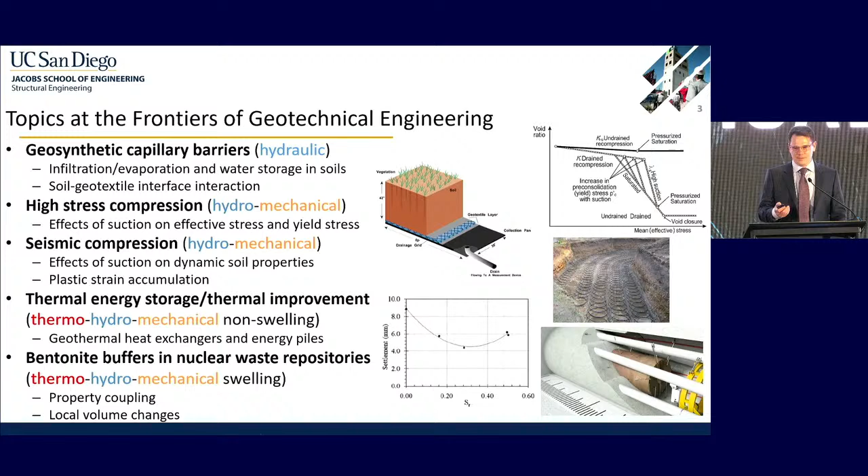There's a lot of challenges with unsaturated soils. I see it as a big opportunity. It's a lot of fun to study these problems.

The first are water flow problems. We'll talk about this with the capillary barriers. The soil and fluid properties change over orders of magnitude. We have different materials that are going to interact in different ways. And water can flow in different forms. It can flow as a liquid, but it could also flow as a vapor. And we need to then understand how water flow is going to be affecting the effective stress in the soil.

Similar to saturated soils, effective stress is an average term that we use to capture changes of mechanical behavior. But in addition to looking at the effective stress, the yield stress is critical in unsaturated soil mechanics. And the yield stress can change with temperature, with degree of saturation. And if you have wetting and drying, you could have even more complicated effects on top of that.

And then coupling is another very important issue because heat transfer processes, water flow processes, and mechanical processes are interconnected, both in terms of the governing equations as well as the properties that we use to quantify these responses.

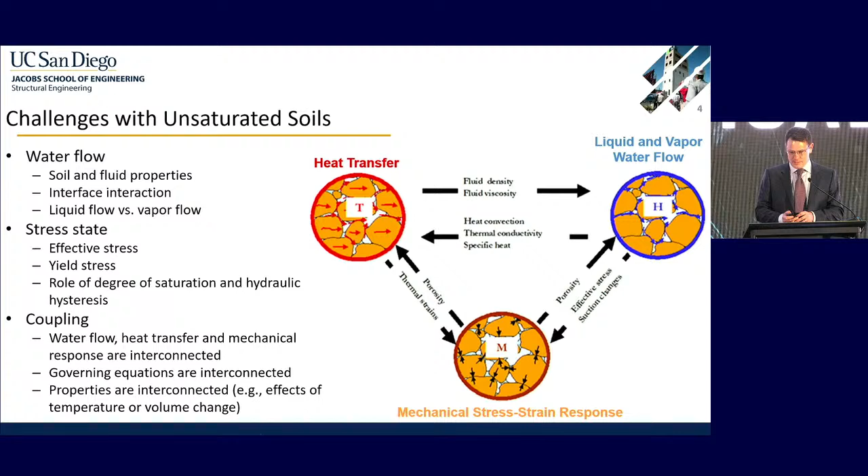So talking about geosynthetic capillary barriers, this was a topic I started working on during my PhD at University of Texas. These are used as alternative landfill cover systems. They're very interesting because they're trying to mimic the natural soil layer where water comes in via infiltration and it is removed later by plants.

One interesting thing that we're seeing in some early experiments is that if you have a geotextile separation layer at the bottom of the soil layer, water will not go into that until the soil above it becomes fully saturated. So we wanted to explain how that happened, and that got me involved with physical modeling, and I'll show some results of those, and started my interest in unsaturated soil mechanics.

One of the most important things with unsaturated soil mechanics is the definition of the soil water retention curve. There's many different techniques, and all of them have different features.

With unsaturated soils, water can flow either by liquid or vapor, and usually we're going to push or pull on either of those phases. So if you want to pull the water out of the soil, it needs to have a continuous liquid phase. So this axis translation technique and hanging column technique require those aspects. But we could also use a technique where we control the relative humidity of the water vapor in the soil, and that requires a continuous air phase. So they're kind of complementary to each other, but two different mechanisms.

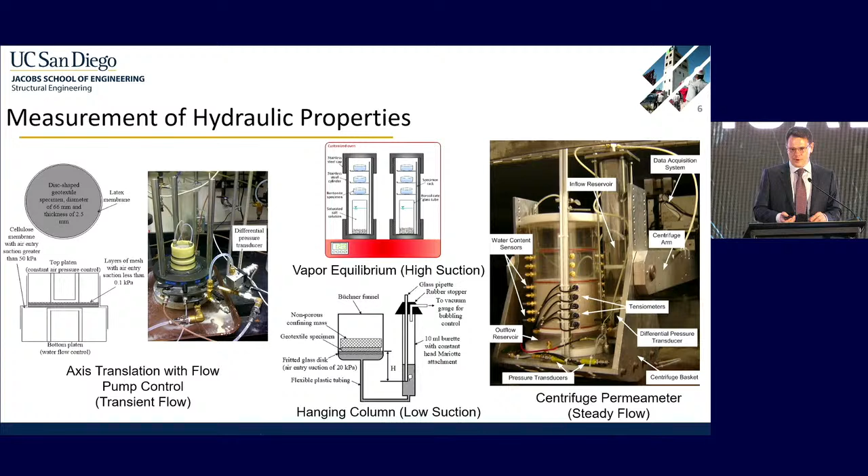Talking about how hydraulic capillary barriers work, usually you have a cover layer of soil on top of a coarse-grained material, which in this case is a geotextile. If your soil is compacted into place, it's usually going to be initially dry, and you can see the blue arrow tells you the initial suction in the soil. The soil water retention curve is shown on the left.

At that same suction value, if you look at the figure on the right, this is the hydraulic conductivity function. One other challenge in unsaturated soils is that parameters vary over large orders of magnitude. Hydraulic conductivity can vary over a large range, and suction, which is the energy state in the soil, can vary over a large range.

So if you're at the blue line there, maybe at 100 kPa, the soil, which we think of as a low permeability material, actually has a higher hydraulic conductivity than the nonwoven geotextile. The nonwoven geotextile is full of air, and that means it can't conduct water. So in order for the water to flow from the soil into the geotextile, that overlying layer of clay needs to become wet. You have to move up the soil water retention curve until you get to the green point where your hydraulic conductivity between the two materials is equivalent. We call that breakthrough, when water starts to flow from the soil into the geotextile.

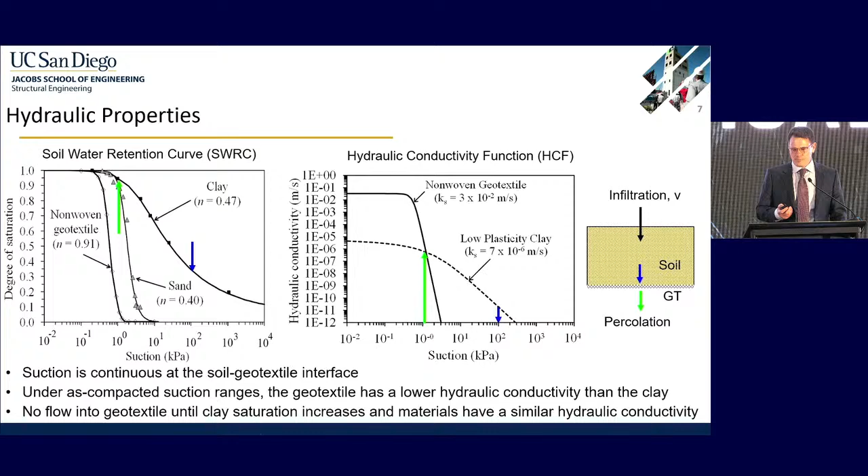This was a complicated problem, and I was a student, and I wanted to understand how it worked. This is back in the phase of my career where I painted everything burnt orange. This is from Texas - I think if you visit Professor Zornberg's lab, you can still see some of the burnt orange facilities. In this, we had a layer of soil on top of a geotextile layer.

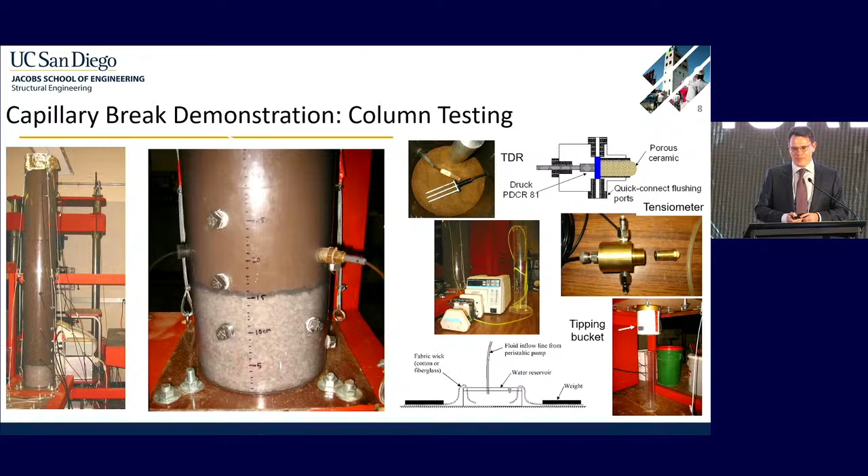We had instrumentation at different depths to measure water content and suction, and we rained water at a constant rate and collected the outflow from the bottom. So these are some typical results that you can see.

In this beginning stage where we have transient infiltration, the water is moving down through the soil, and suddenly it reaches the geotextile. You would normally think that it would just travel into the geotextile because the geotextile is a very permeable material - we use it as a filter, as a drain material. But because of this contrast in pore size, water starts to build up on top of that, and you can see it gets wetter right above the barrier layer, and you have an increase in water storage in that area.

So this is an example of using physical modeling to understand how the water process is flowing through the soil, and how we can understand the increase in water storage.

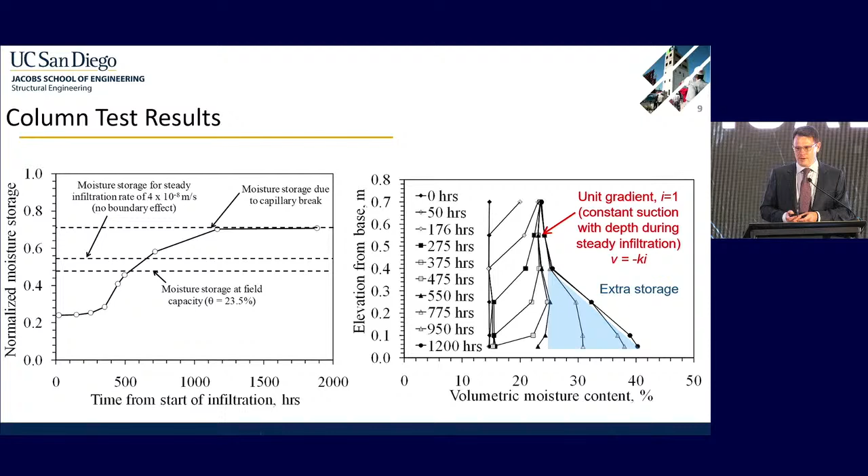I also had the privilege to work with Professor Zornberg on geosynthetic capillary barriers in the field. This is the Rocky Mountain Arsenal in Denver, Colorado. They wanted to build one of these evapotranspirative cover systems, and they wanted to test to see how it works first. So they put a geomembrane barrier at the bottom, and they wanted to collect all of the water that came down to the layer of this geomembrane. Then they put a geotextile on top of that to act as a drain. So even though they weren't hoping to create a geosynthetic capillary barrier, they created 4 of them instead.

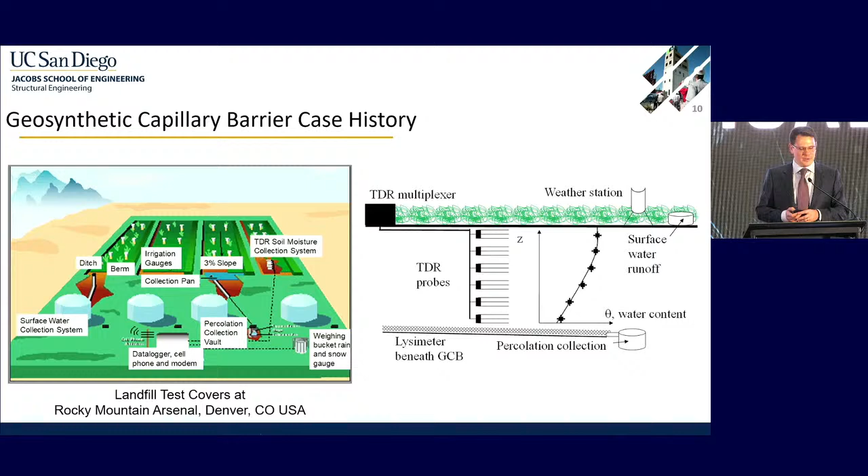There were some challenges with the data from this site because it got struck by lightning several times, if any of you have been to Colorado. My first paper that I wrote was correcting this water content data, and we saw some interesting results once we filtered that out. At the ground surface, it was getting wet and dry.

It's changing as the atmosphere is interacting with the soil. But then, as you go a little bit deeper, there's some moments in time where the soil starts to get wetter. And when you go deeper down in the soil, you see that it even gets wetter than that, almost fully saturated. So this is kind of mimicking what we saw in our column tests, where water starts to flow in, we have a unit gradient, and then it starts to build up at the base. Fortunately, because Colorado is a very arid place, evapotranspiration removed the water, so it was able to recover after that.

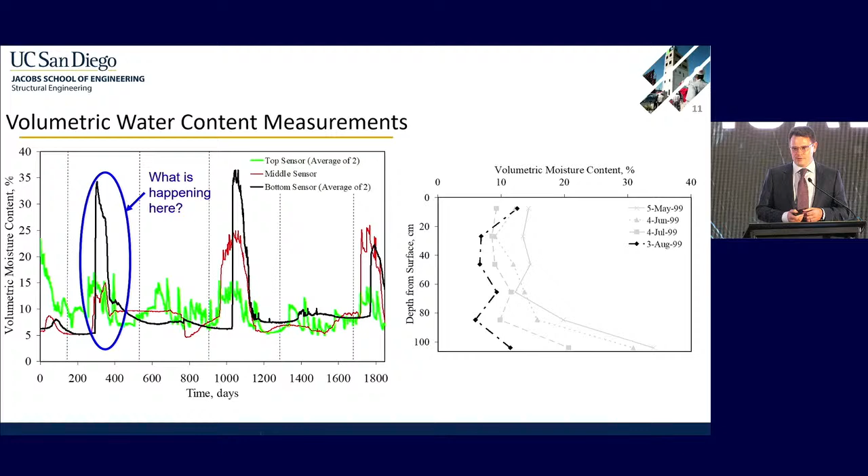So there's still problems to solve on this topic. This is just showing that over time, these covers are storing water during the rainy season and removing it during the dry season. Over time, they're behaving relatively well. If you look at the water balance from the moisture storage, you find very little percolation, so very little water went through the base of these cover systems. So it works pretty well.

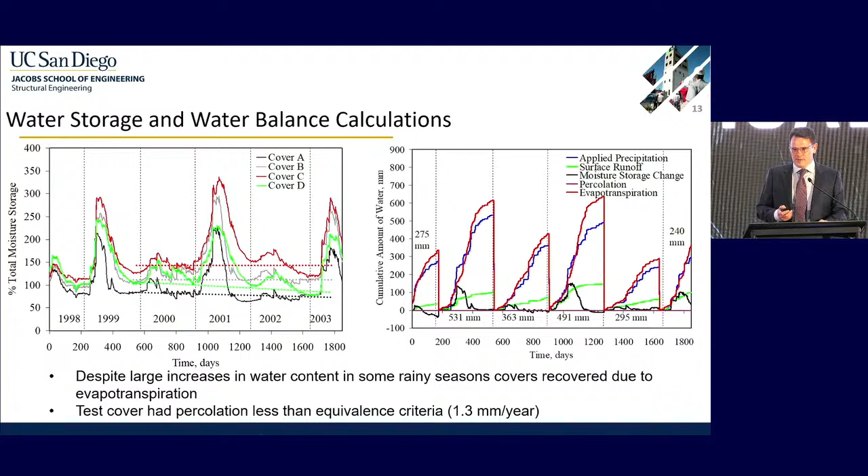We decided to keep doing some additional tests to see if these cover systems could recover. We did some mini column tests where we measured the periods of breakthrough, then dried the soil out and tried it again. It was very repeatable. So even if we do have breakthrough and water gets through the system, it's going to be able to recover over time.

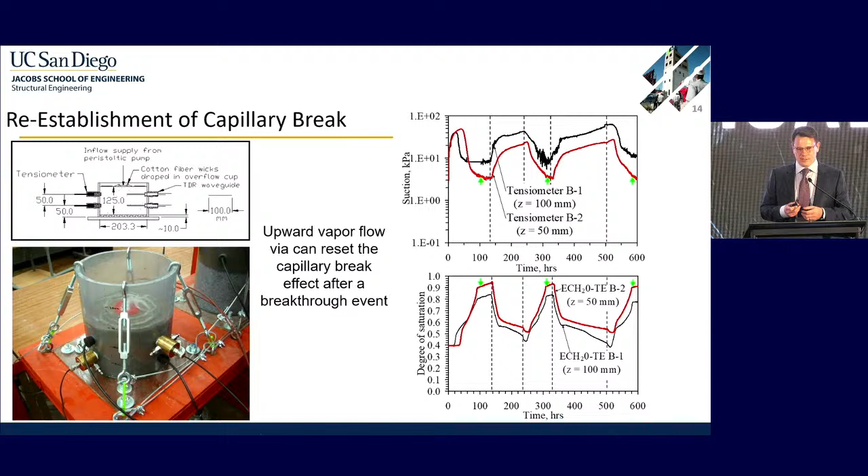So a few takeaways from this first topic. Laboratory and field scale testing are critical to interpret the behavior of near surface soil layers under atmospheric boundary conditions. We can use the different principles of unsaturated soil mechanics to make these covers work. But it's very important, if we want to improve our numerical simulations in the future, to measure hydraulic properties using the flow processes that are happening in the field. So if we're having infiltration and evaporation, you want to use tests that have those same pathways in order to match what's happening in the field.

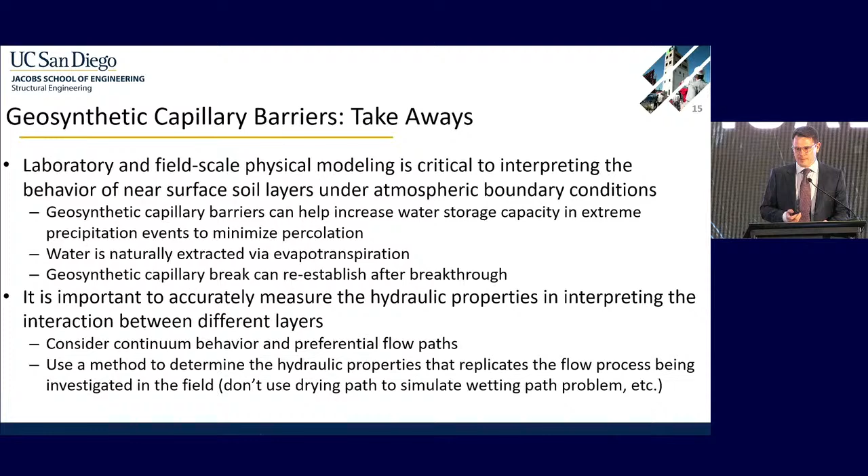So that was my first encounter with unsaturated soil mechanics. The second topic I started working on at University of Colorado, when I went back to start my career in academia, was the behavior of unsaturated soils under very high stresses. I wanted to take some of the things I learned from this first case history and put it together on this. We're looking at a project for ONR on buried explosions.

These processes can happen very fast, but fortunately, one of the key parts of the solutions to these problems is the backbone curve - just your quasi-static compression curve of the soil. Most geotechnical problems only go up to about 10 MPa. In this case, we were going out to about 70 MPa. So we're able to see how the soil behaves under these conditions, and unsaturated soils can have a very major effect on the behavior of the soil in these cases.

So the first thing we need to use is the effective stress. The nice thing about using effective stress in unsaturated soils is that you can integrate the soil water retention curve into the definition of the effective stress, and you could potentially use this to capture the changes of effective stress during wetting and drying. So that's the first component you need to look at mechanical processes.

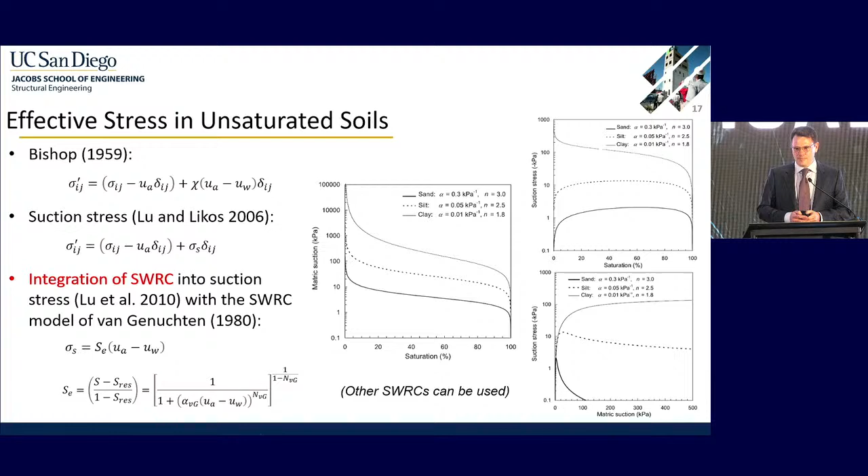We're using the soil water retention curve to model infiltration and evaporation, but now we're also using it to represent our stress state. It's very well established that the shear strength at failure shows an increase in the apparent cohesion of the soil as it dries out. If you interpret that shear strength versus the effective normal stress for different suctions, everything lines up onto a single line using effective stress.

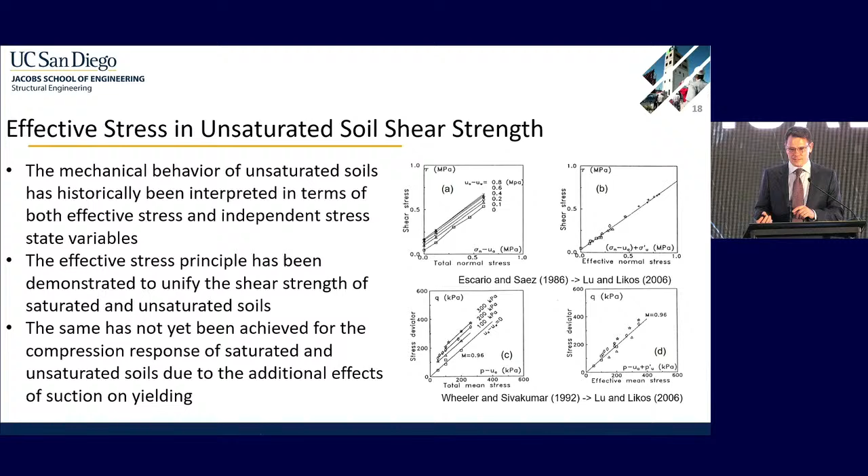So effective stress is used to capture changes of shear strength at failure, but people haven't had a lot of luck applying effective stress to compression problems. That's because suction also has an effect on the yield stress. Back in the 1960s, there was a big controversy about using effective stress to model the compression of unsaturated soils.

So until you start to accept that you need to use both the effective stress concept and the yield stress concept to capture unsaturated soil compression, you're not able to use unsaturated soil mechanics and effective stress to capture the compression response.

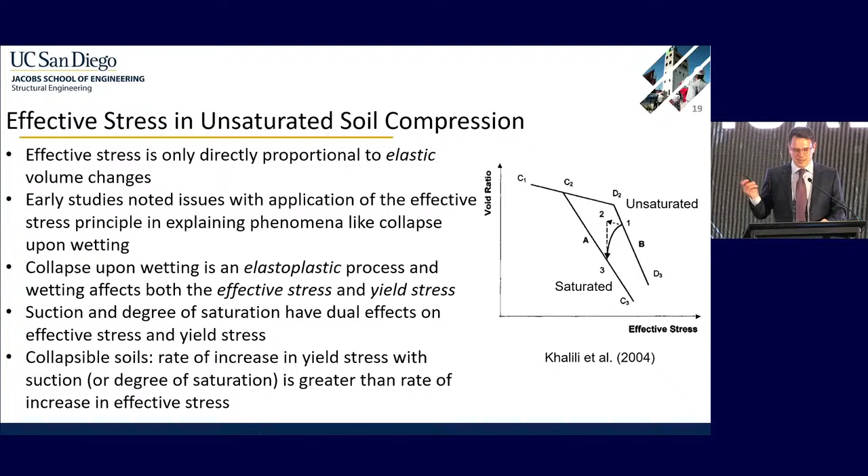So we started from that perspective, and we started to look at the behavior of soils when you load them to high stresses. First we would apply some initial suctions to the soil and then start to load it out. We do see this increase in yield stress as the soil gets drier.

One interesting thing we wanted to look at when we go to high stresses is that you can squeeze all of the pores and get rid of your air. This is the case of a drained compression where the air is allowed to escape. At some certain point, your compression curve needs to converge with the saturated soil. So we can call that pressurized saturation.

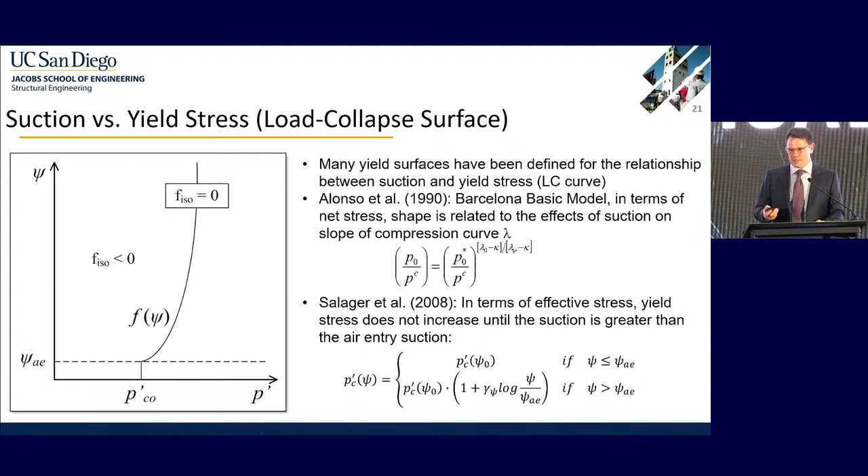And the slope of your compression curve for unsaturated soils should always be inclined back towards the saturated curve. This is the concept of the yield stress load collapse curve. As your suction increases on the y-axis, the yield stress increases and the soil gets harder and harder as you go out. There are different equations that have been used to capture this in terms of net stress or in terms of effective stress.

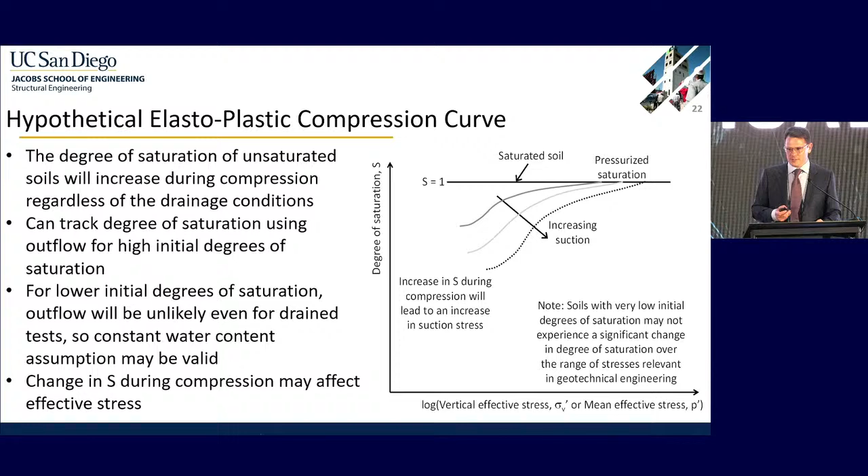This is just showing how the degree of saturation is going to be increasing. It's very tricky to track the degree of saturation in unsaturated soils, but if you don't measure this, it's not going to be very easy to apply the effective stress technique. So in these cases, you can see the soils are initially dry, and you compress them up to high stresses, and you reach this pressurized saturation state.

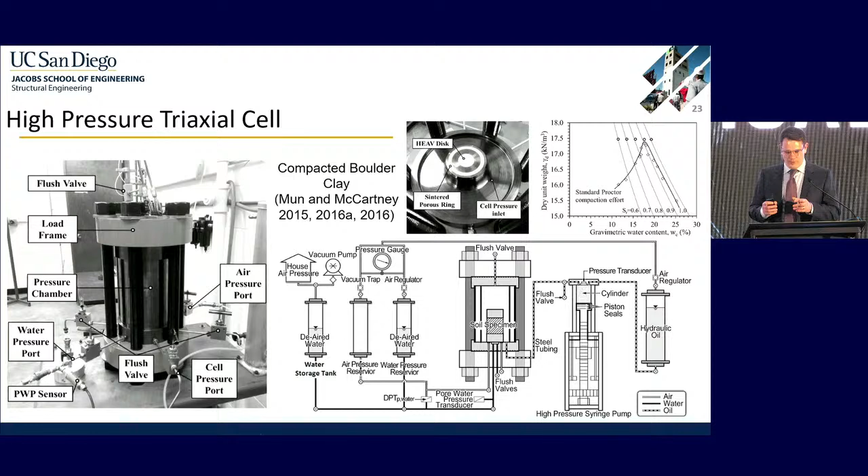When you go out to higher stresses than this, things get a little bit weird. The bi-log linear model that we usually use in geotechnical engineering is not going to work very well when you go to high stresses, because things get squished down.

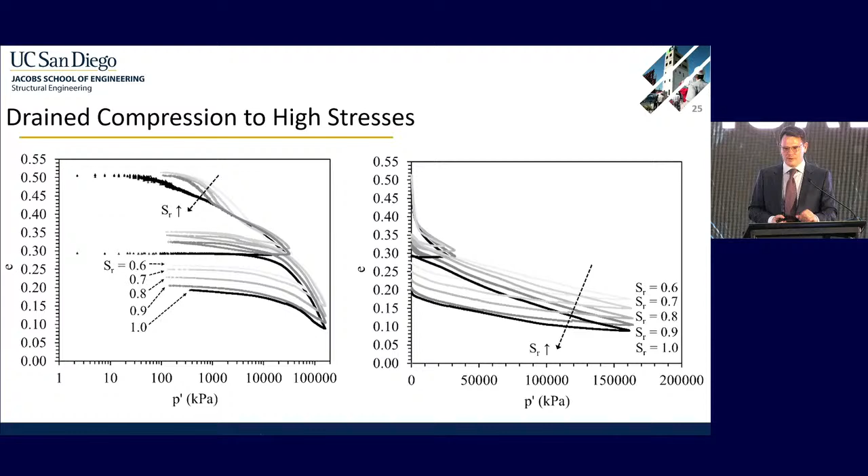These are drained compression tests where we keep the suction constant throughout the compression stage. We could also do undrained compression tests. This is probably more representative of what will be happening during a fast loading case.

In these cases, the water is not allowed to leave. You have air still in there. And when you pressurize this, the air can dissolve into the water. So this is another interesting part about unsaturated soils that makes things complicated. You can see that there's a steep decrease in the void ratio up to a certain point, and then it follows the compression index of water once you get to this high stress.

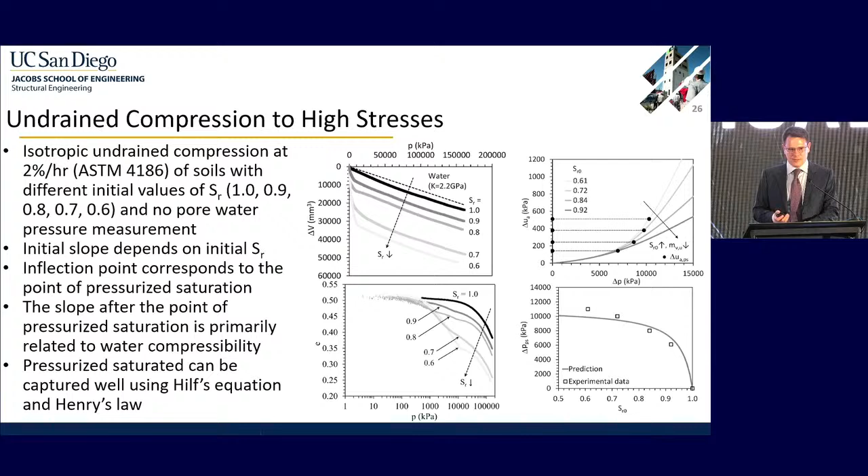So we're getting pressurized saturation without allowing the air to leave. We're dissolving the air into the water. And we can use some techniques like Hilf's equation combined with Henry's law to predict this pretty well.

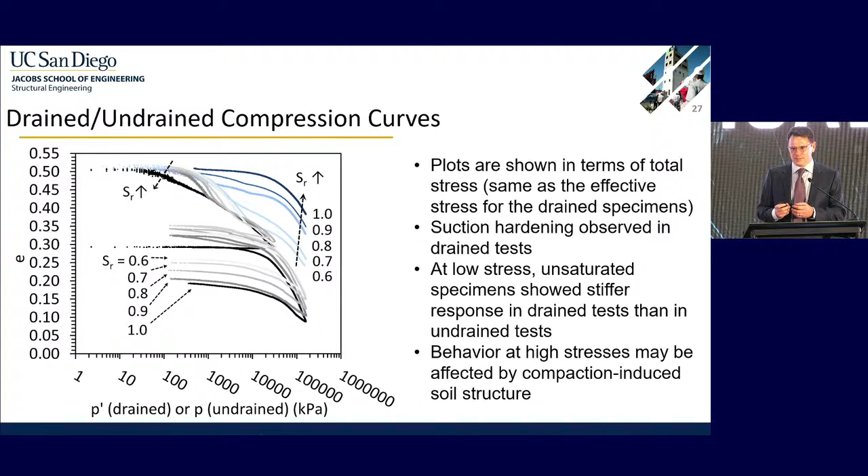But then putting the undrained and drained together, it's interesting to see that you have the saturated curves on either side. The saturated curve under undrained compression is basically compression of water. And then the saturated curve for drained conditions is the softest state. And if you have undrained conditions on a very dry soil, it's going to be very close to the compression of a drained soil.

We tried to put our results into the context of the literature. We went and reinterpreted some of the results from previous studies in terms of effective stress. And we found that the trends that we were expecting from our conceptual model held for most of the soils.

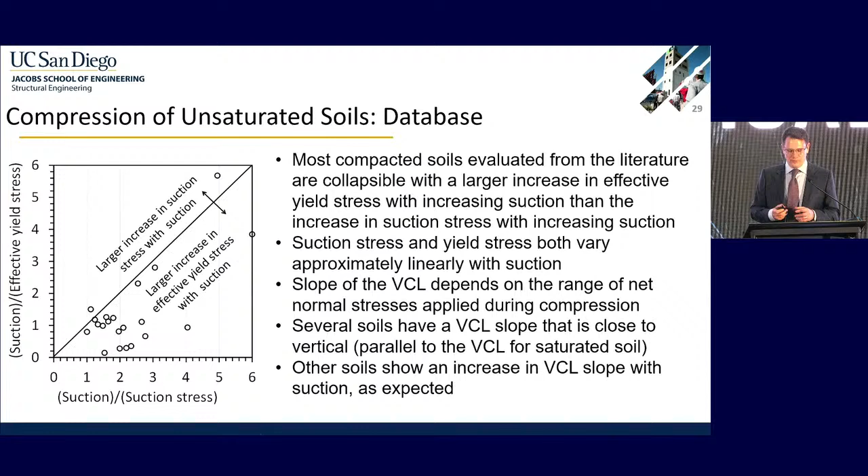Our suction stress at yield increased with suction. Our effective stress increased at a different rate. You can see that usually the yield stress is increasing at a faster rate than the suction stress. And the virgin compression curves were generally either vertical or inclined, going back towards the saturated curve. So most of the soils in the literature, we're going to call those collapsible, because they have a greater increase in the yield stress than the increase in suction stress.

One other tricky thing we've looked into, but I think is still a topic for future research, is the role of hydraulic hysteresis. The soil water retention curve is not unique—we have a drying path and a wetting path, and we want to integrate that curve into our effective stress equation, but we can have two paths for that. When you compress the soil, either under drained or undrained conditions, you could potentially start to change your soil water retention curve as well.

On the drained case, you can see that the soil water retention curve is shifting upwards as you compress the soil, so you need to take that into account when quantifying the effective stress. In undrained conditions, you're going to be following some sort of a scanning path.

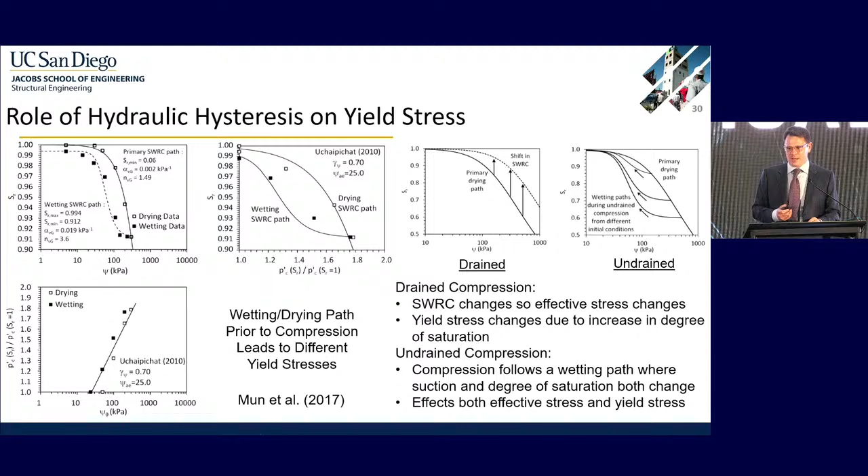So there's a lot of potential still on this topic to make further advances. We want to make sure we integrate our soil water retention curve into our stress state, and consider these independent effects of suction on the effective stress and the yield stress. All soils become saturated when you load them to very high stresses.

Okay, going on to the third problem. So now we had quasi-static loading. When you live in California, you have to work on earthquake-related problems, so I decided to get interested in the concept of seismic compression—the settlement of unsaturated soils during earthquake shaking due to void collapse.

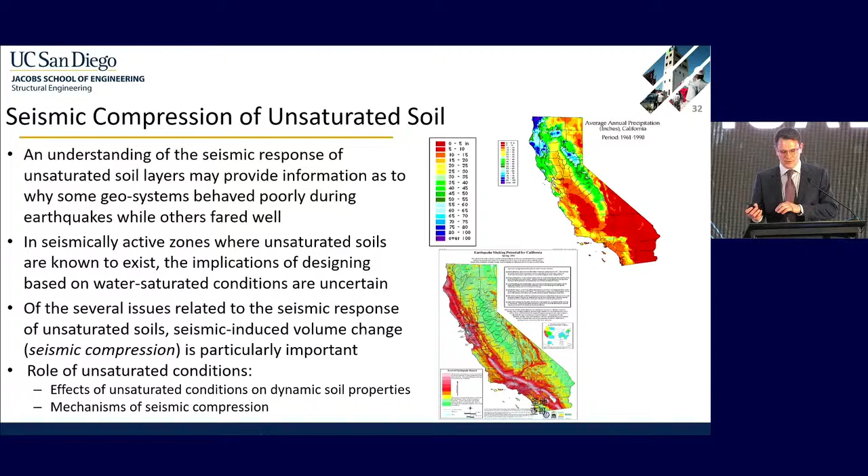This effective stress that is present in the soil actually tends to provide a restraining effect to prevent the soil from settling as much as it would want to. So you have a positive effect on the unsaturated side where capillarity is preventing the soil from collapsing, but you also have a lot of air which is able to collapse during shaking.

We need to very carefully consider the drainage conditions we're expecting. If you're doing everything very slow, then the water has time to leave, and your soil water retention curve could change in a similar way to what we saw during the static compression.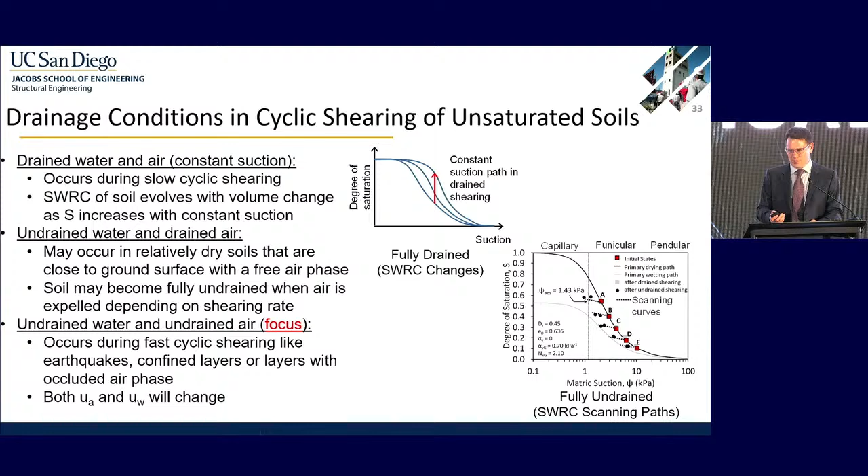But if we have fully undrained cyclic shearing, you're going to be wetting the soil along a scanning curve, and moving up, and the rate of increase in suction on these scanning curves could change based on the initial conditions. The tricky thing on these tests is both the air pressure and the water pressure could change during cyclic shearing. This is a topic that many people have worked on in the past.

During this cyclic shearing, the voids filled with air are going to be softer, so they're going to collapse, rearrange, and densify. The pore fluids in the soil are going to pressurize during undrained shearing. The suction is the difference between the air pressure and the water pressure, so if you have differential pressurization of the two fluids, you're going to have changes of suction.

The soil could start in a relatively dry state, and as you start to collapse it, you're reducing the volume of voids, so your degree of saturation is also going to go up. So we have suction changes, degree of saturation changes—together they make the effective stress change, and we know that our shear modulus is going to depend on the effective stress. A lot of interesting things going on.

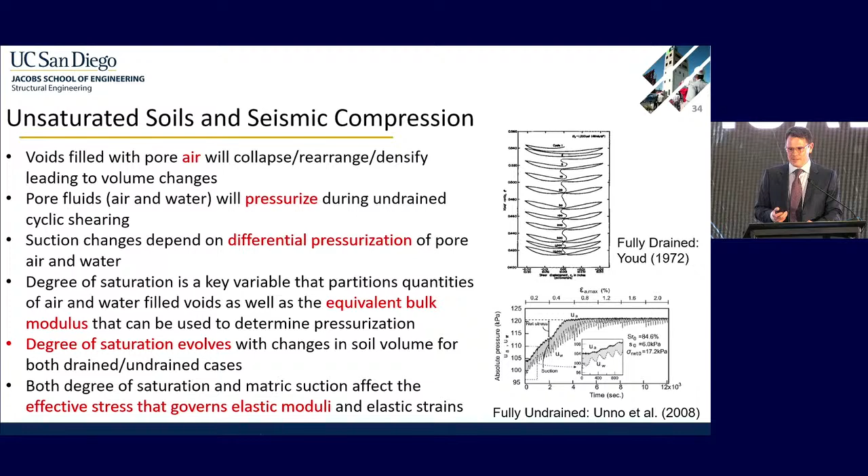The first thing we studied was the effect of suction during wetting and drying on the dynamic soil properties. We modified one of Ken Stokoe's devices to test unsaturated soils, and came up with trends showing that the shear modulus depends not only on your effective stress, but also on the yield stress. So if you wet and dry the soil, you get plastic hardening of your yield stress, and a permanent increase in the shear modulus of the soil.

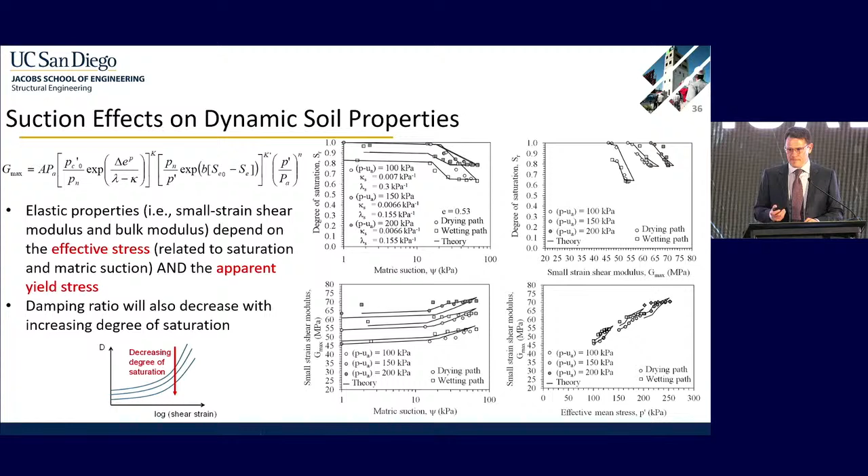Then we wanted to try to come up with some equations to predict the seismic compression of soils. Together with my student Majid, when I was at University of Colorado, we came up with an empirical methodology that took data for compression of dry soils during earthquakes and post-liquefaction reconsolidation of saturated soils.

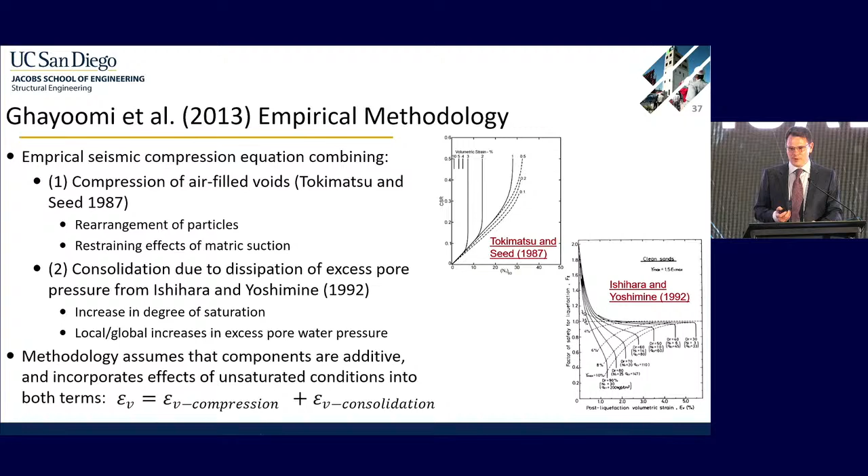Putting them together into an additive equation with some features to incorporate unsaturated conditions, we came up with a prediction of our seismic compression as a function of degree of saturation. So validating this is very complicated.

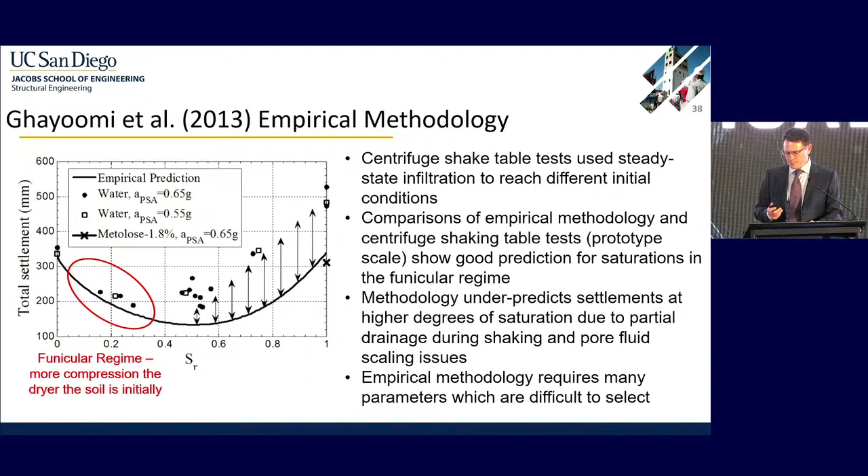We did centrifuge testing, and we took the concepts from our soil water retention curve testing with the centrifuge permeameter and applied it, just shook the soil after we reached steady state infiltration. We were able to reach different initial degrees of saturation, and we got a pretty good match in the funicular regime. When we got to wetter conditions, there were some scaling issues with the pore fluid, so we didn't quite capture that well. There could also be post-liquefaction recompression that we didn't accurately capture.

One of the challenges with that empirical methodology is that there are many parameters, and changing one of them has major effects. So we wanted to keep going back to the drawing board and redevelop this.

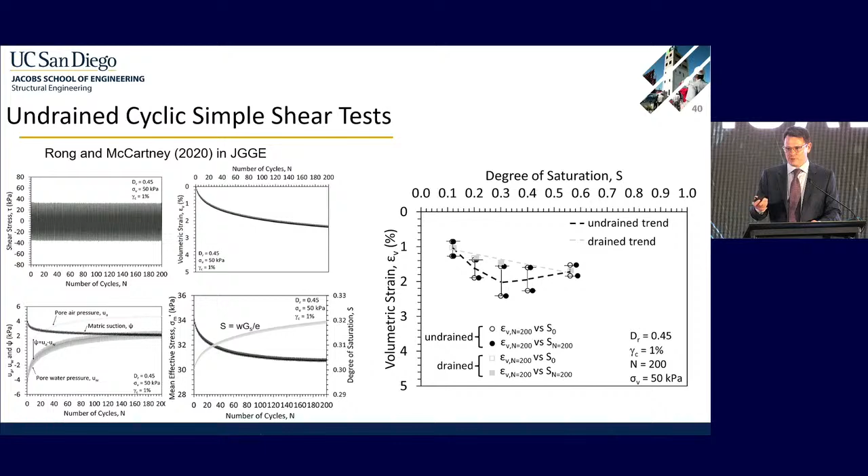Then we wanted to model this. So we took our results from the UBC sand model, and we adapted it to consider the impacts of unsaturated conditions on the shear modulus, which is basically the slope of your stress strain curve. We were able to get pretty good trends.

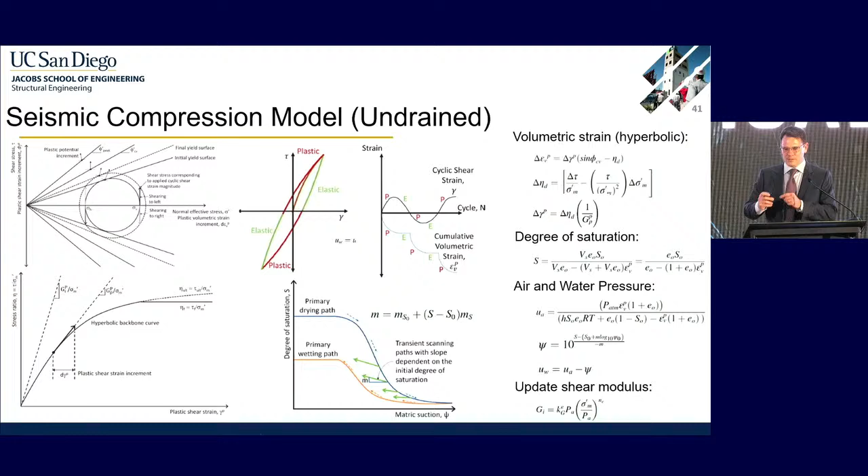We had to first predict the changes of degree of saturation based on the amount of volumetric contraction. We used Boyle's law to figure out our changes of air pressure. Then we had a model that looked at the scanning path of the soil water retention curve to figure out our changes of suction and water pressure. We updated the shear modulus on each cycle of shearing and compared that with some of our experimental results and got a relatively good match.

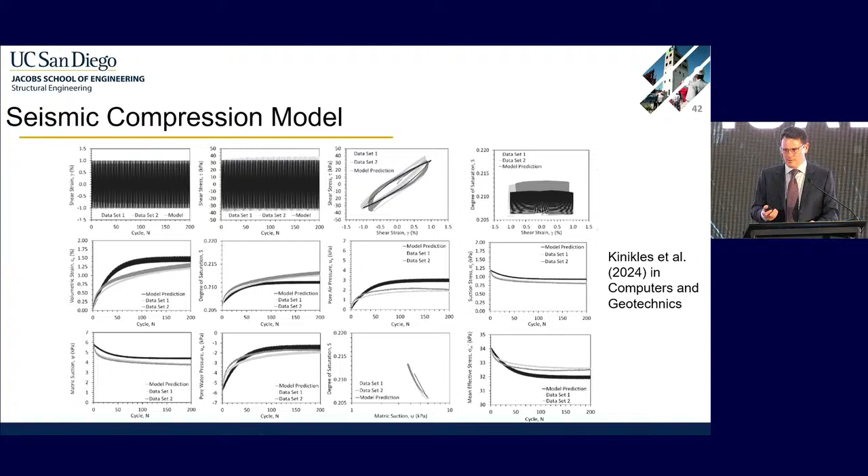There's still a lot of potential to improve this in the future. So the takeaways from this topic: we're able to capture the transient trends in the seismic compression in the funicular regime, although when you go to large numbers of cycles, it unfortunately stops behaving so well. But we believe we're in the right direction on this topic.

So switching gears now to temperature, this is my main interest in my research. One of the things I worked on with my students is trying to take heat from sustainable sources and inject it into the ground, not only to store the heat so we could use it later, but also potentially to have a benefit on the geotechnical properties.

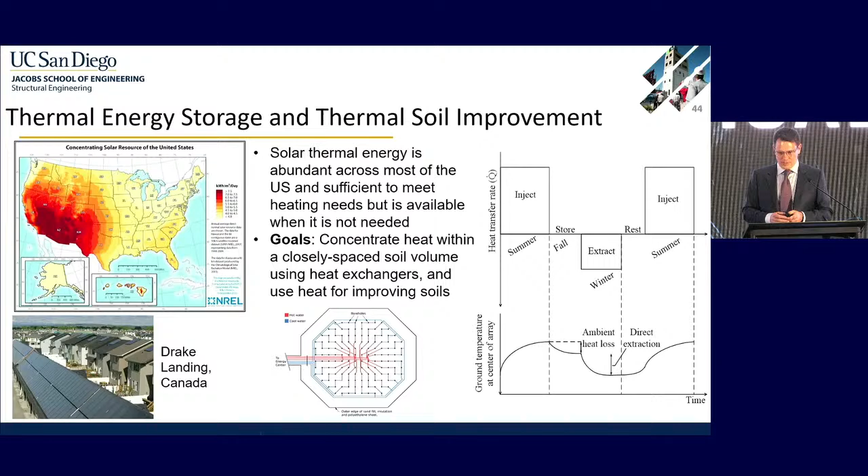In these concepts, you take heat throughout the summertime, usually, and inject it into borehole arrays. These can either be vertical or horizontal. Then in the winter, you would extract that to heat your houses. These systems work. One of the coldest places I've been to is Drake Landing in Canada, and they are able to provide 98% of their heating from this borehole storage system.

Our goal was to put these into the vadose zone, the zone of soil above the groundwater table. Even the Drake Landing site I mentioned is in saturated glacial material with groundwater flow, and whenever you have groundwater flow, it takes the heat away from where you're wanting to store it. In the vadose zone, you have very little groundwater flow. You do have some infiltration and evaporation, but the soil here has lower thermal conductivity, so it has lower heat losses. One challenge is that now you're heating the soil, it's actually going to cause the soil to dry, and we have some additional coupled processes that we need to consider.

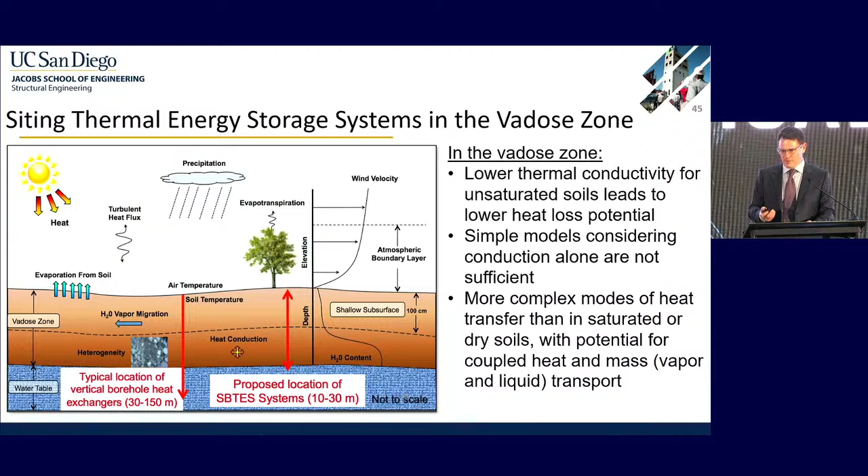So the first thing we decided to do is make a physical model of this. At UC San Diego, you can see in the background of the lower right figure our shake table facility. I was able to acquire a small area of land. We drilled boreholes 50 feet deep, put in an insulation layer, and then collected heat from solar thermal panels and injected it into the ground.

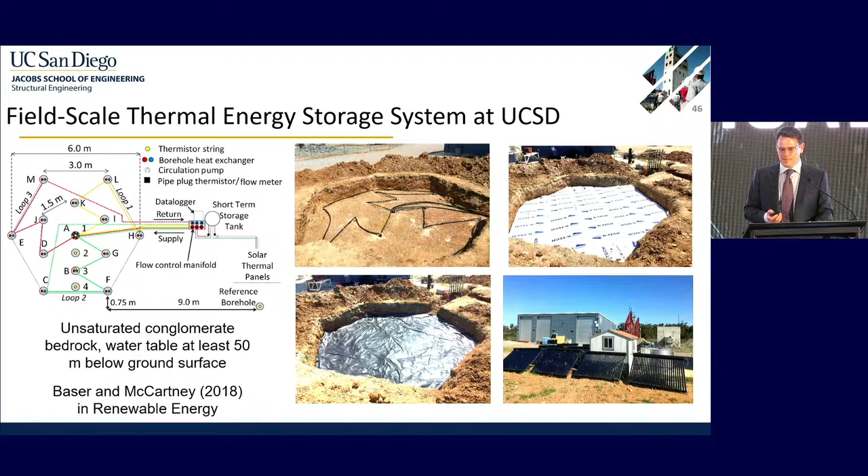We only did tests for about 6 months, but we were able to increase the ground temperature about 12 degrees Celsius, which is relatively small, but if we continued to heat the soil, the water we were injecting into the ground was 90 Celsius, so we could have gotten to higher temperatures.

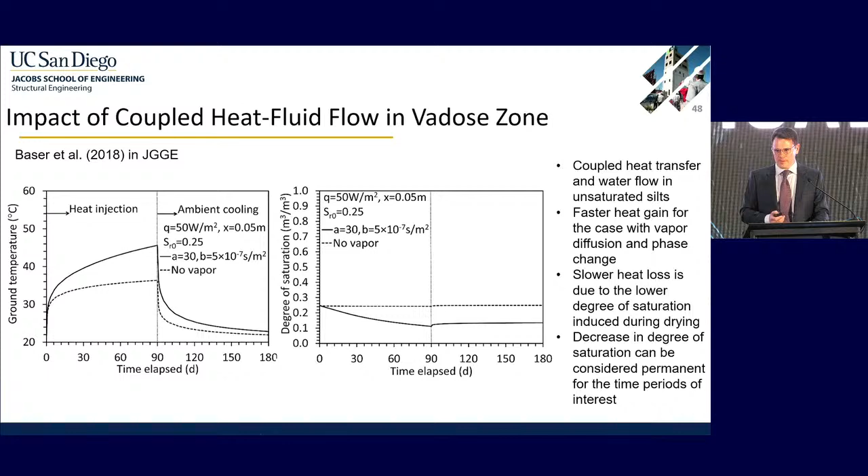That was a positive trend, that we could figure out how to heat the ground using sustainable sources. Now we wanted to see how that would potentially improve the ground. One interesting thing we found from coupled heat transfer models is that when you heat the soil and cool it, you could have a permanent response. The water gets driven away, but when you turn off the heat, it doesn't come back toward your heat source. So we came up with the idea of thermal improvement, where we're heating the soil, driving the water out.

However, there are additional effects of this heat on the behavior of the soil. Heating causes the soil to dry, increasing suction and making the soil stiffer, but heat also affects the yield stress in a different way, causing a softening. So now we have competing effects of heat on the yield stress, and we need to see which one is winning.

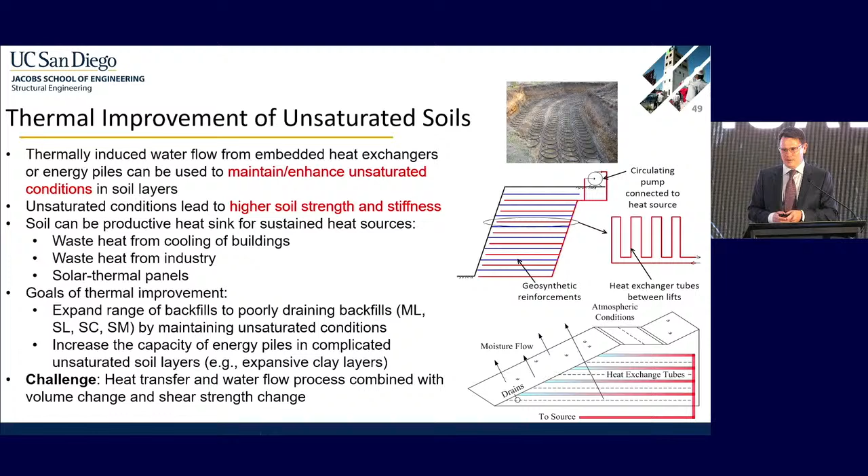We haven't built a full-scale model of these in the field. We've done some laboratory cases, but if you had a geosynthetic reinforced structure, you could put your horizontal heat exchangers there, or in an embankment, and drive the water out of these systems. You'd need some approach to prevent the water from coming back in if you have an infiltration system. But our first goal was to understand how this thermal improvement would work.

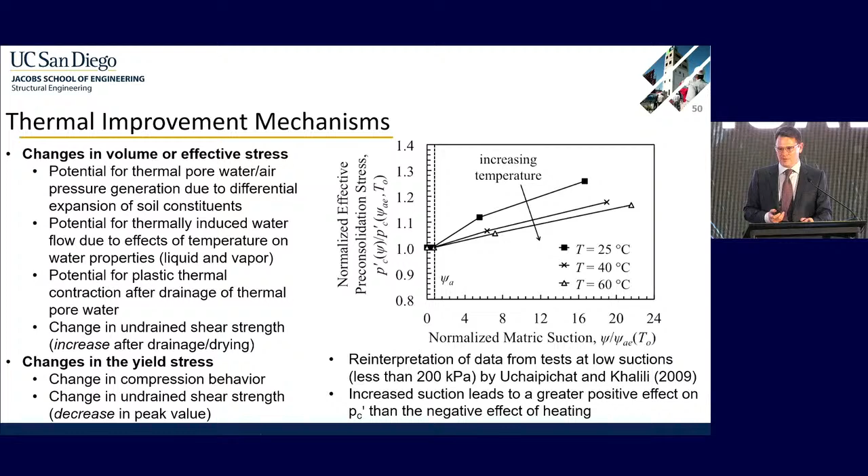We've looked at very high suctions as well, going up into the megapascal range, because when you're drying the soil, you're probably going to go to a very dry case where your degree of saturation is less than 10%. There have been relatively few studies on dry soil like this, and we do see that there is an increase in shear strength in these conditions, and the effective stress principle still applies.

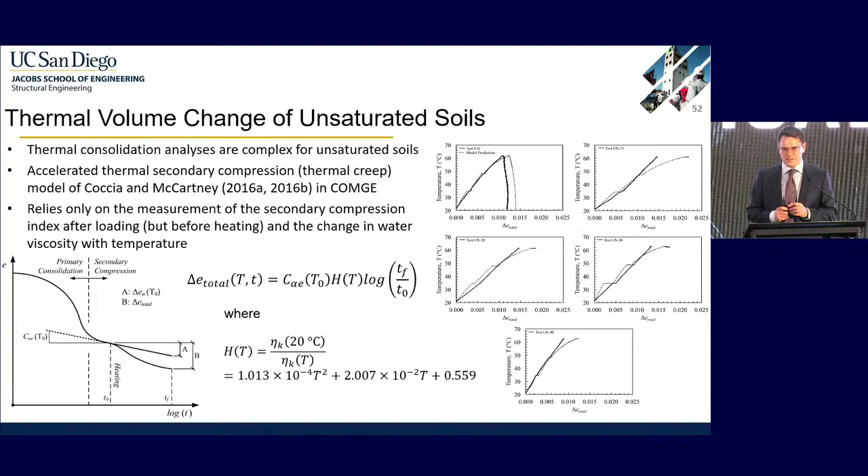Thermal volume change is also very complicated. We can come up with some elastoplastic techniques or some accelerated creep techniques. But then our goal here was, again, to do some physical modeling - let's see how this works when we put all of these systems together.

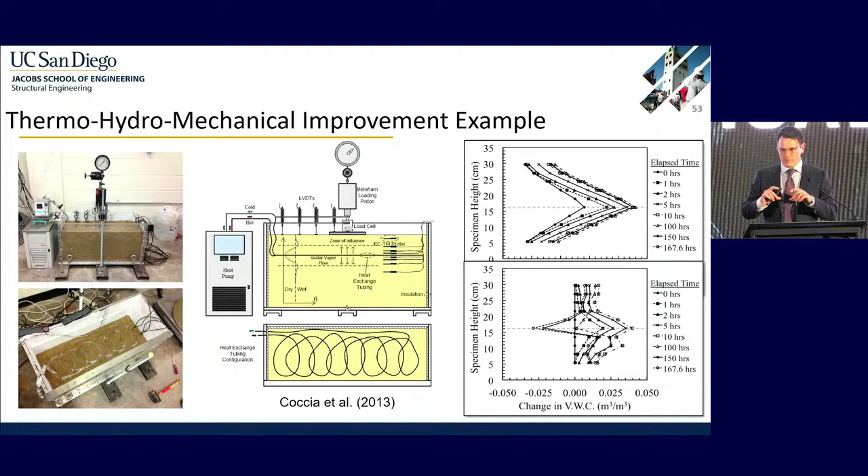This is one test that Melissa, who introduced the session, helped me with when she was at Colorado. We just had a horizontal heat exchanger. We circulated hot water through it. We caused drying - you can see the temperature on the top and then the degree of saturation on the bottom. So we had a relatively narrow band where the soil got drier.

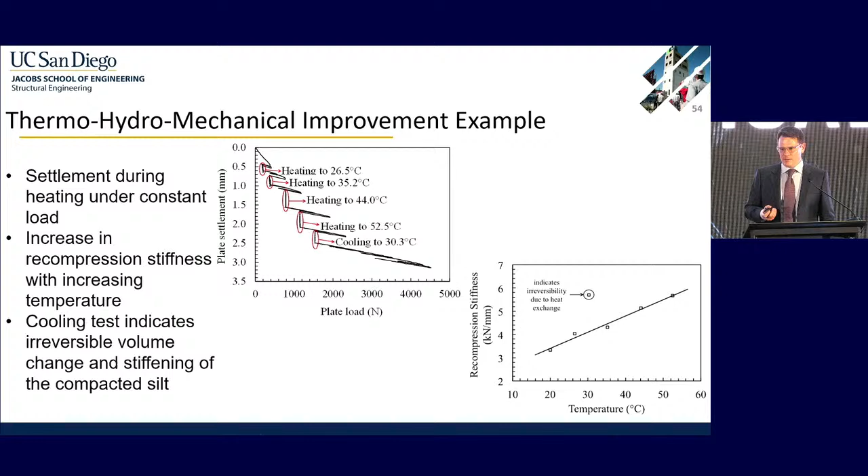And then we did some plate load tests. So heating the soil to different temperatures, allowing this flow process to happen, and then loading it, we saw that there was a stiffening response.

We also wanted to see, could we apply this to deep foundations? At University of Colorado, we have a centrifuge. We can look at the impact of unsaturated conditions on the compression curve. So we made some mini energy piles where we had heat exchange loops inside your concrete foundation, put it into a tank of unsaturated soil in the centrifuge, spun it up, and heated the pile to different temperatures, and then loaded it to failure.

This is something that could be pretty challenging to do in the field, just due to the scale and the number of tests necessary, but in the centrifuge, it's a feasible technique.

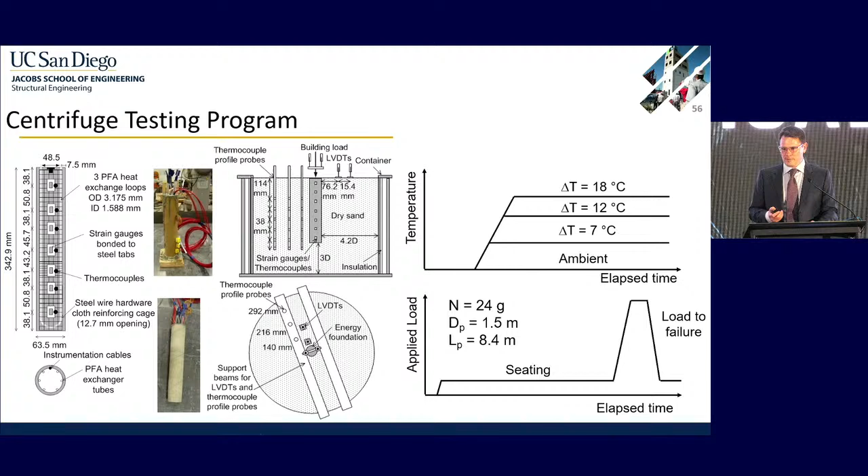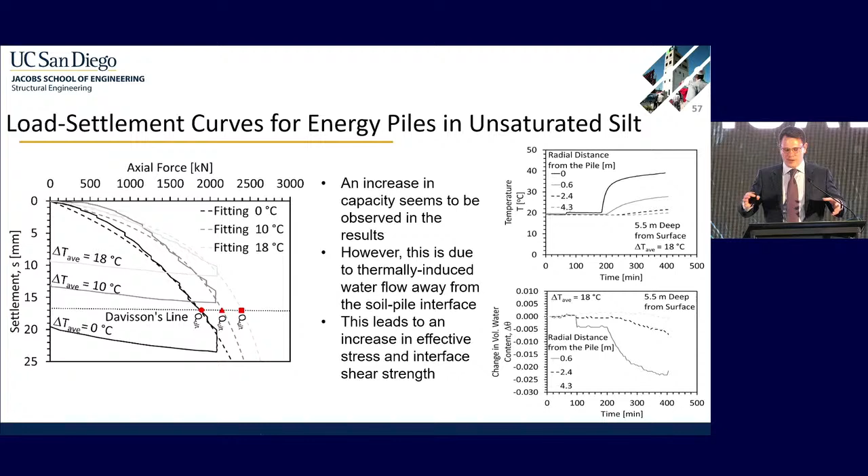The interesting thing we found is that when we heated the pile and allowed the soil to dry around the pile, we had an increase in capacity. We can see that Davisson's criteria can give us the capacity changes. We also monitored the water flow, so we saw a drying effect.

Calibrating these, we sometimes need to do physical modeling tests on the soil in order to calibrate the parameters. So in order to predict our undrained shear strength, our pile capacity value changes with temperature and suction, we had to do an additional test where we had a thermally induced drying of a soil.

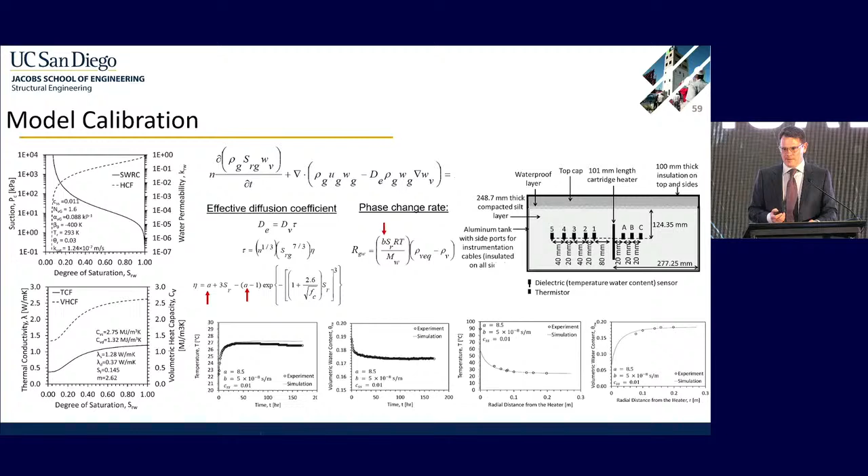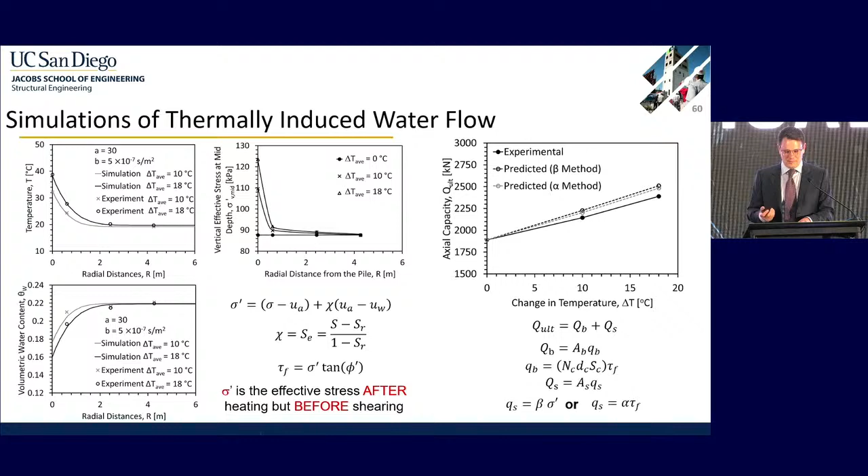But once we had our model working, we could predict what was happening right at the soil-pile interface, and the drying effect did lead to a substantial increase in effective stress. Predicting our shear strength from that effective stress, we're able to predict the increases in pile capacity effectively. So I think this is a technique that hasn't been used in the field, but we've done the laboratory demonstrations to get it working.

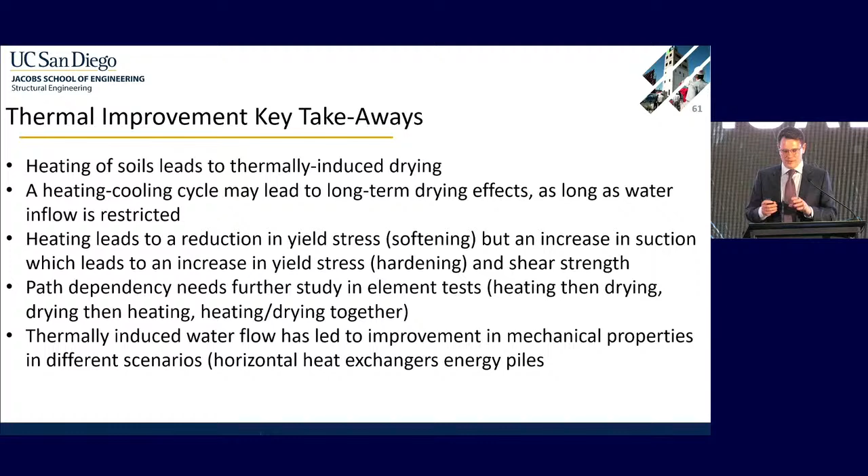This project actually leads into the last topic today, where we have heating of soils, but this one is on bentonite buffers. At the moment, the United States does not have a repository for storing spent nuclear waste from commercial applications. They did a lot of study on this Yucca Mountain facility, but due to political reasons, they've stopped the investigations on that site, and the Department of Energy is collecting data from countries in Europe who are doing repository testing.

One interesting thing people are looking at internationally is that if we do have a repository, it's probably going to be a constrained space. So we need to put the waste canisters closer together, and when you do that, suddenly the temperatures induced by the radioactive decay of these materials can reach 200 Celsius.

One of the reasons we want to model these is that when we're getting the permit for one of these repositories, you need to extrapolate its behavior out over tens of thousands of years. So if you have the heater in the middle, the heat is moving away from it. These are usually buried deep below the ground, so the water pressures in the host rock could be very high, giving you hydration from the outside. So you have wetting from the outside and drying from the inside.

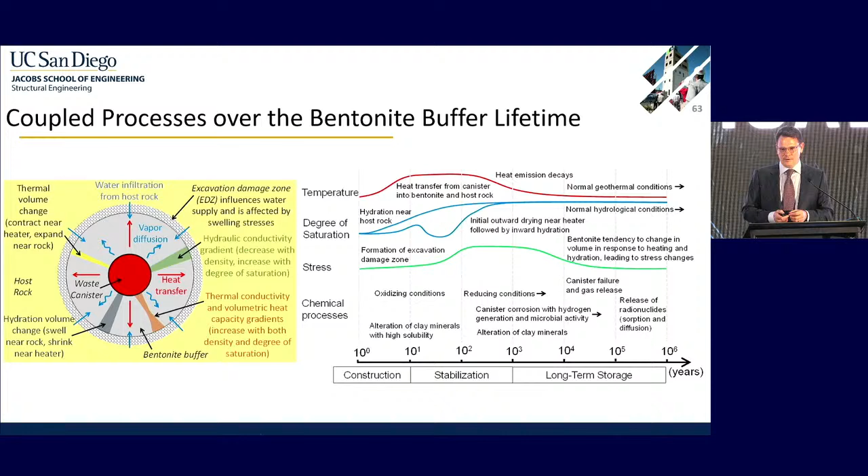As you're having globally constrained conditions, the soil is not able to change in volume overall, but it could change locally. You could have drying near the heater and shrinkage near the heater and expansion near the outside. So these are the new fun things to predict.

There have been some studies here, but in most cases they use relatively simple models, with hydraulic properties measured at room temperature to predict what's happening at 200 Celsius. The predictions are not horrible, but when you're trying to extrapolate this out for tens of thousands of years, there could be challenges.

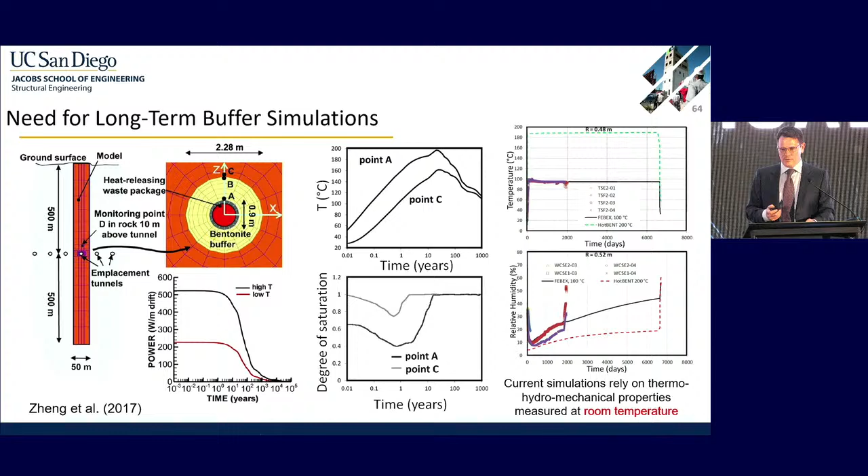So the first thing we decided to do was look at the soil water retention curve developed by Ning Lu. This is a very nice equation that tells you the water retention mechanisms due to capillarity and due to adsorption, and look at some of the key points along that curve and see how they're affected by temperature.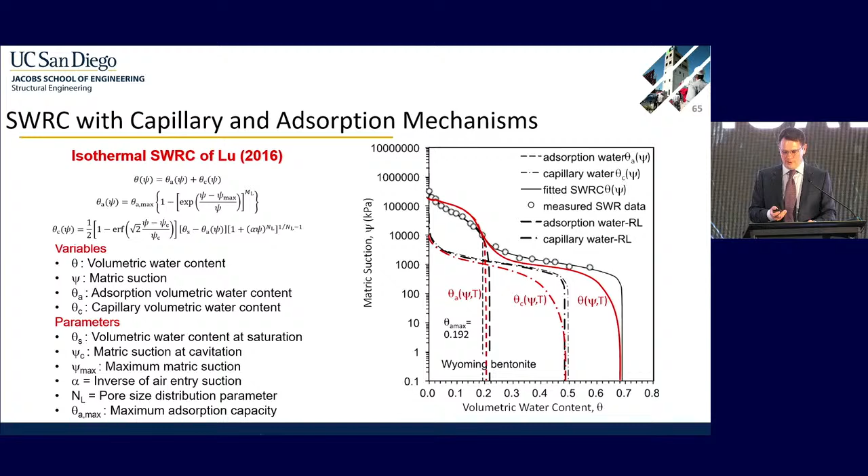It's well known that temperature affects capillarity. It changes the surface tension of the soil and the liquid-water contact angle. So we do see a small reduction in the water content at water retention at low suctions due to this capillary effect. The mean cavitation suction is the point where you change from capillarity to adsorption, and there are some equations we can use to predict those changes as well.

Those are mostly related to the maximum adsorption water content. So now we need to go back into clay mineralogy, and we know that the diffuse double layer, which tells about how water is bound to the particles, is dependent on many issues: the cations, the valence, but also temperature. We found that as the temperature increases, you have an increase in the size of your diffuse double layer, or your maximum adsorption water content. But going beyond that, you start to have a decrease.

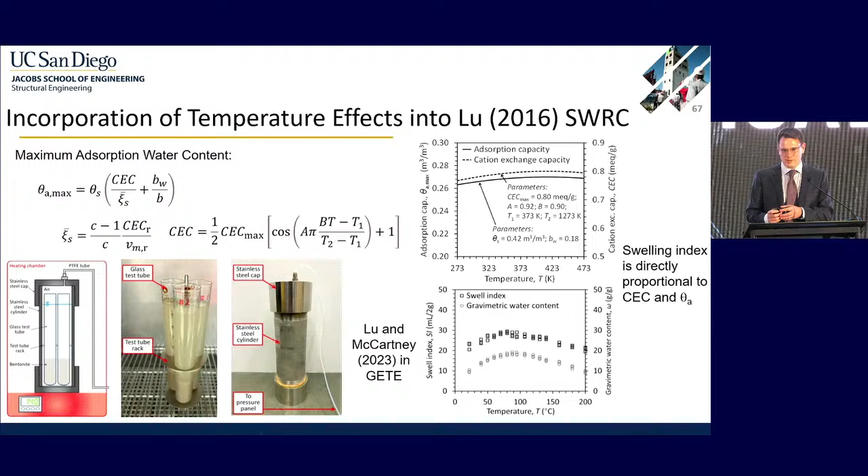So in order to do these tests at high temperatures up to 200 Celsius, we have to do everything under pressurized conditions. So we had to develop a little pressure cooker that we're testing our soils in.

Next, the maximum suction, when the soil dries out to the very highest suction, is also affected by temperature. And when we put all those together, we come up with a very long, big equation. You can see the effects of temperature on this lower right figure.

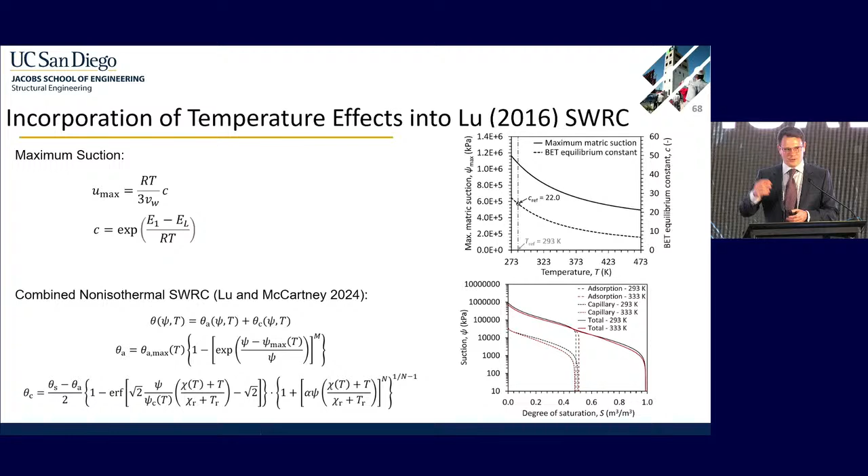They don't look very significant, but because we like to plot things on log scales, those are actually pretty substantial changes of suction. So we're working now on trying to validate these hydraulic properties under high temperatures. As I mentioned, when you dry the soil out at a temperature above 100, it should go to 0. But in these repositories, you can have superheated conditions. So in this case, we need a pressurized chamber that acts like a pressure cooker, where when you heat it up, you can still have liquid and gas, but in superheated conditions. The water doesn't boil because it's under high pressure. So when we do this, we can use this vapor equilibrium technique and measure the soil water retention curve at temperatures above 100.

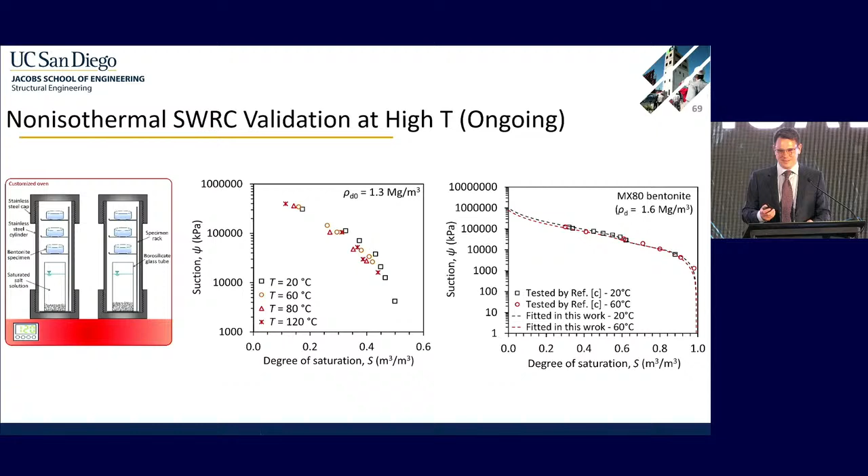This is going to be interesting when we finish these tests. One problem with bentonite is everything takes a year to get each point. But then going back to physical modeling, we wanted to see how these coupled processes work. They are doing some field tests in Switzerland, but it's very slow to get the data, so we wanted to replicate these in a lab situation.

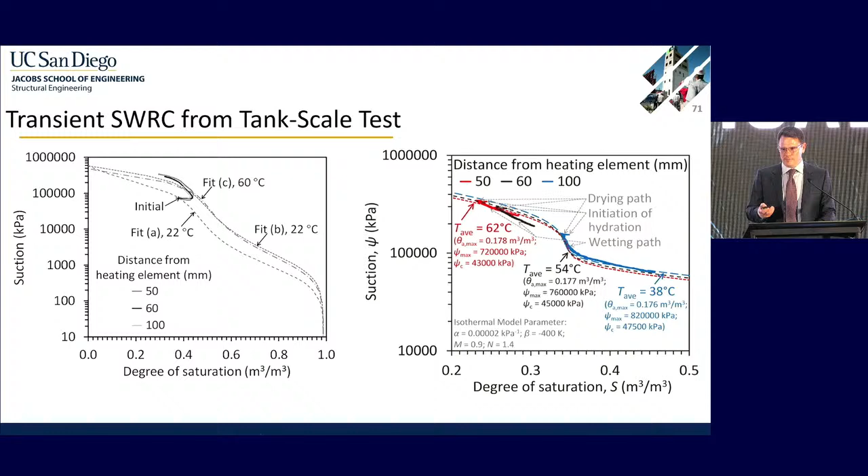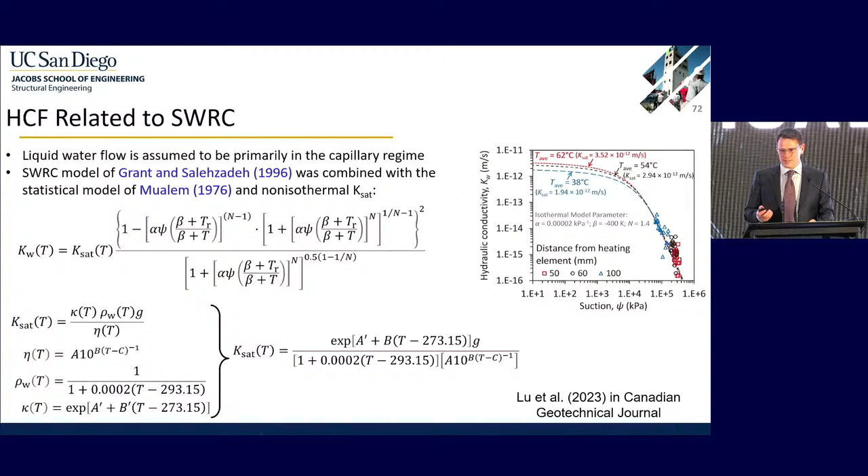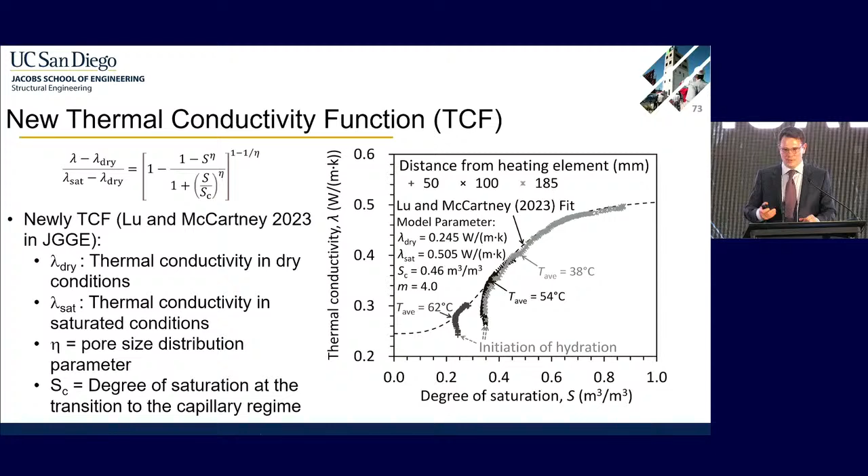And then going into hydraulic conductivity, this is usually mostly relevant for nearly saturated conditions, but we can add in these effects of temperature onto that parameter as well. Thermal conductivity does not depend on temperature, but it does depend on the shape of the soil water retention curve. So we can get the data from these physical model tests to validate our hydraulic and thermal properties.

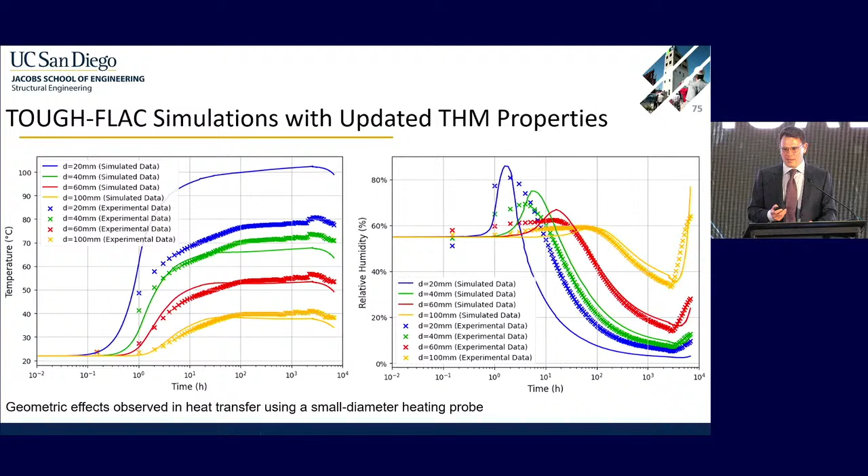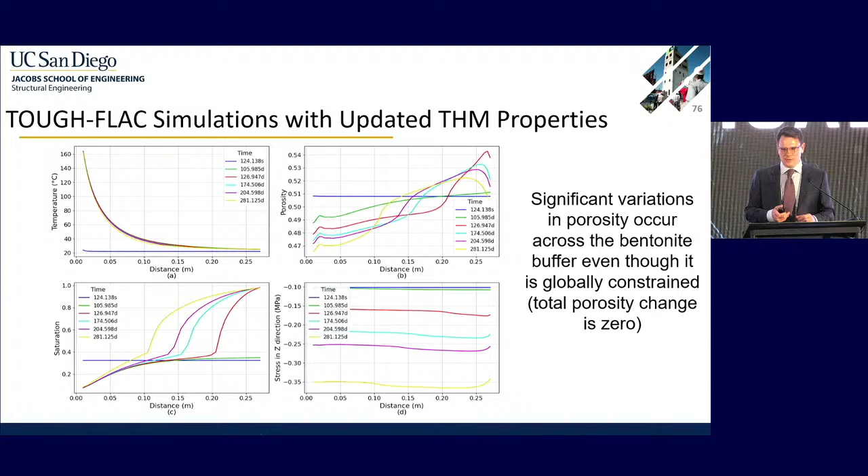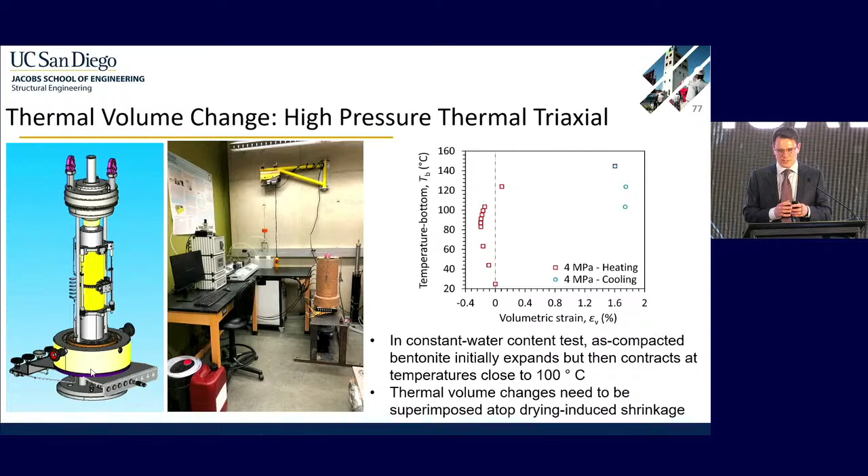And our most recent results, we're trying to heat the soil to temperatures above 100, and when we're at low temperatures, the soil expands, but at higher temperatures, there starts to be a transition point where the soil starts to contract. These are under high stresses, so you're not necessarily desiccating the soil, but you do get a reduction in volume near the heater. Okay, so some key takeaways from this topic. This is a very coupled problem, not only hydromechanical, but also the swelling of these materials.

So some final comments, trying to tie together these five different topics. It's very important to accurately quantify the soil water retention curve using a technique that uses the same flow process encountered in the field. We want to understand the effects of hydraulic hysteresis pathways on a given problem, because we could have permanent hardening of the soil. We want to understand how suction and degree of saturation can affect the effective stress, but also the apparent yield stress, and then understand how that has subsequent effects on the compression response or the shearing response.

We need to carefully consider the coupling between the thermal hydromechanical processes and properties. I hope that I showed, as going through these five complicated topics, that it's critical to perform physical modeling experiments to really understand what's going on and check the predictions that we're getting from our numerical simulations. I recommend to the geotechnical field as a whole, keep collecting data from case histories, especially involving unsaturated soils, so that we can continue advancing this field.